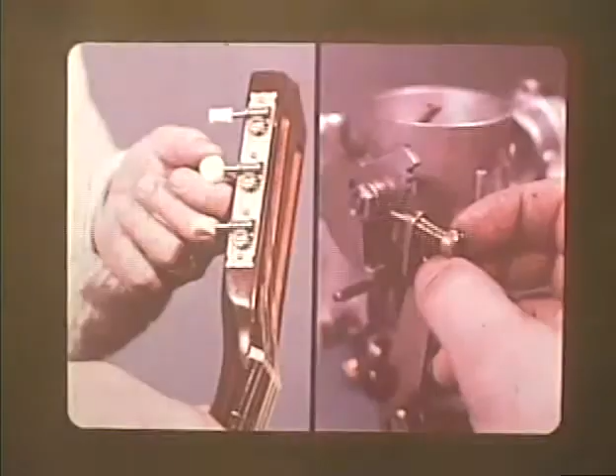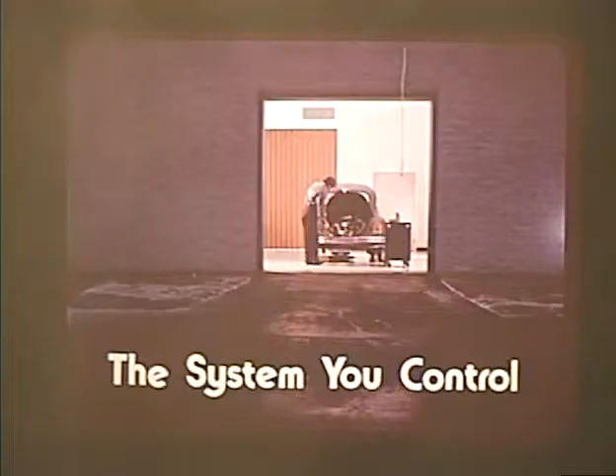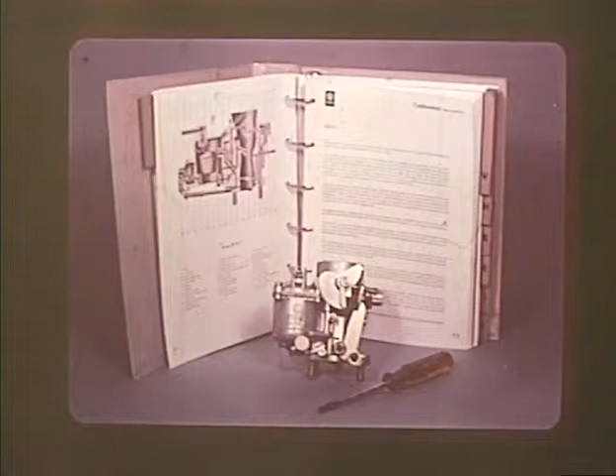Whenever you work on the repair or adjustment of a Volkswagen carburetor, you're really involved in a system that has to be kept in tune. Once it's in your hands, it is a system you control. Its many parts and circuits are all designed to operate at maximum efficiency, all engineered to the highest standards in the automotive business. And even though the Volkswagen carburetor is designed to virtually regulate itself, there's a critical adjustment that depends on your skill to make that system perform the way it was intended.

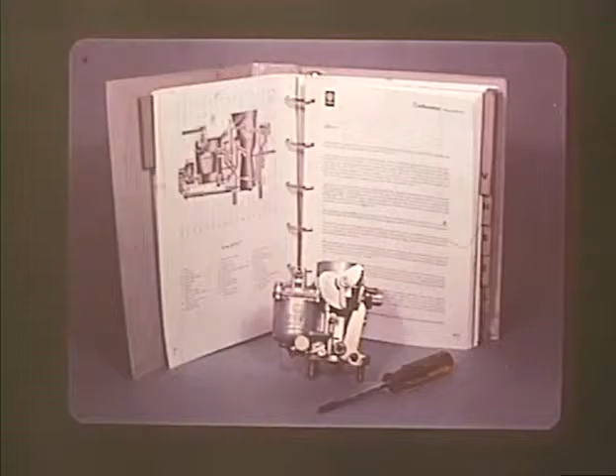We're talking about the idle speed adjustment. So whether you're working with the 28 PICT, the 30 PICT-1 or -2, the 30 PICT-3, or even the 34 PICT-3, it's the idle speed adjustment that brings the Volkswagen engine up to full, smooth efficiency.

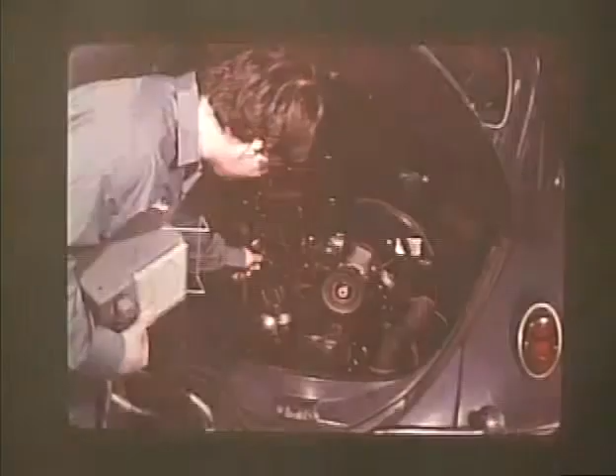And that efficiency is based on two factors: the idle RPM and the air-fuel mixture. It's this combination, correct idle RPM and correct mixture, that keeps the engine running efficiently, not too fast or slow, or too rich or lean.

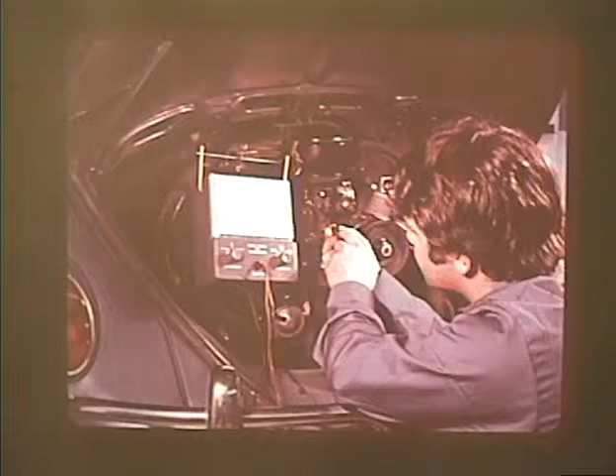And here's where you come in. Let's talk first about idle speed. Turning the idle speed adjusting screw to the right opens the throttle valve and increases the engine speed. Turning it to the left closes the throttle valve, reducing the speed.

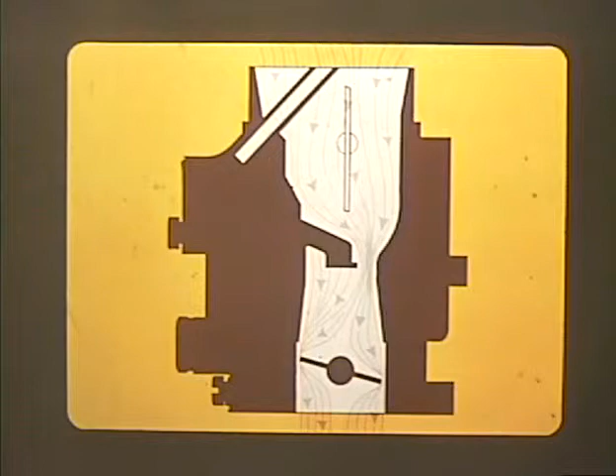But what's actually happening to the system as you adjust the idle speed? Let's take a look inside. As the engine runs, the intake strokes of the pistons draw air through the carburetor. The carburetor, which is like a tube, has a throttle valve towards the bottom, which controls the amount of air to the engine. Air rushing through the narrow opening between the slightly opened throttle valve and the carburetor causes a vacuum under the throttle valve.

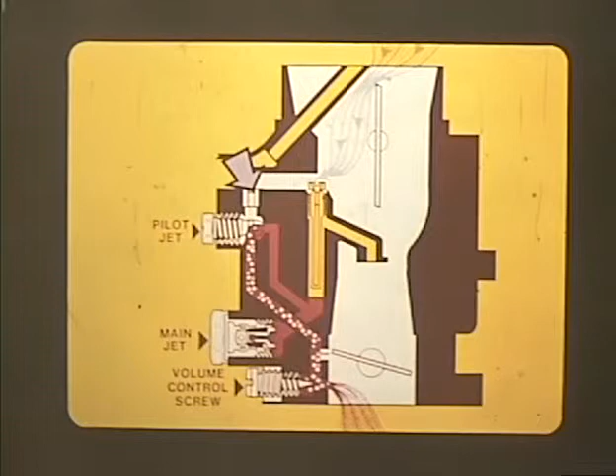This section of the idle circuit diagram shows the fuel about to be mixed with incoming air. The vacuum, which is below the throttle plate at idle, draws fuel from the float bowl through the main jet to the pilot jet. Air for the pilot jet is drawn into the circuit through a calibrated hole at the top of the carburetor. The fuel and air meet and mix at the pilot jet, and this mixture travels to the volume control screw, where the amount or volume of this mixture is controlled before being allowed to be drawn into the engine.

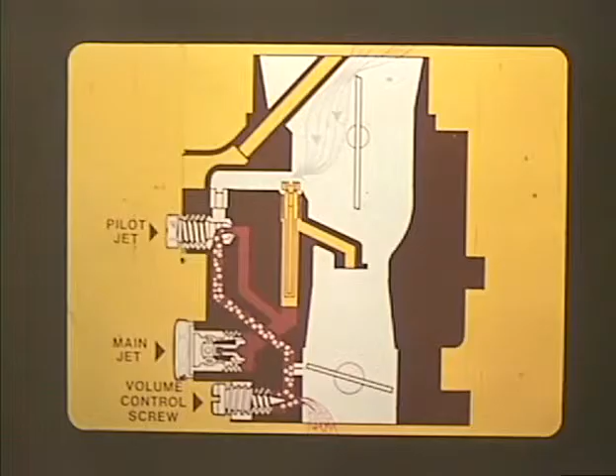Turning the volume control screw inward closes the passage and reduces the amount of idle fuel-air mixture. Turning the volume control screw out opens the passage and allows a greater volume of idle fuel-air mixture to travel to the engine. So we are concerned with only two carburetor adjustments for correct engine idle: engine RPM and idle fuel-air mixture. Of course, there are many other factors which influence engine operation: condition of the ignition system, ignition timing, compression, and engine temperature.

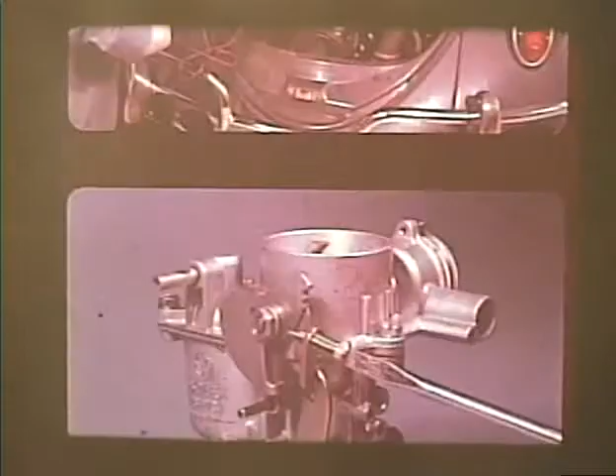A tachometer must first be attached to the engine before correct adjustment can be made. Turn the idle adjusting screw in or out until the idle RPM is correct according to the tachometer. Then adjust the volume control screw, turning it in slowly until the engine speed starts to drop. Then turn it out between 1/4 and 1/2 turn until the engine runs smoothly. Now repeat the idle speed adjustment, watching the tachometer, and if necessary, readjust the volume control screw.

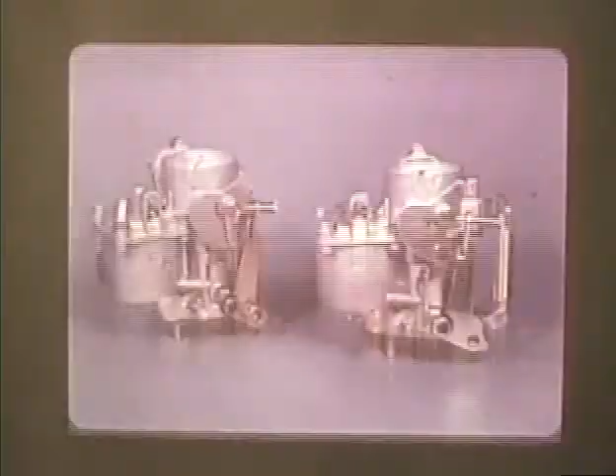We've been talking generally about the 28 PICT and the 30 PICT carburetors. Although they are different models, they do have the same adjusting sequence: first the idle RPM, then the volume control screw, and finally check the idle RPM again.

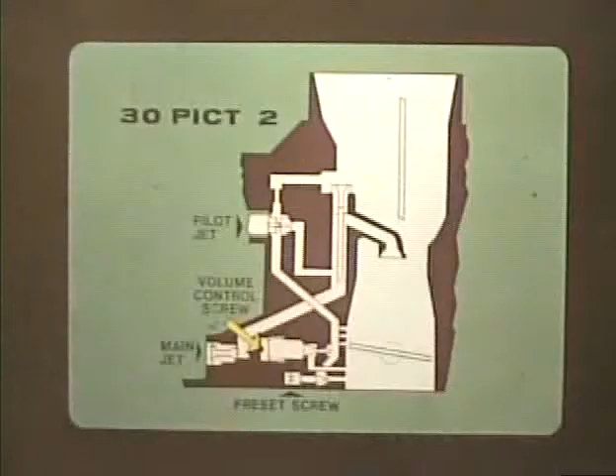But on cars equipped with emission control devices, some changes were made that require different adjustment techniques. The 30 PICT-2 carburetor, which was installed on 1968 Types 1 and 2 vehicles, is the first of the emission control carburetors. The idle speed is controlled by an adjusting screw which opens or closes the throttle as before, but notice the changes in the idle circuit. Air entering the idle circuit passes through a calibrated hole to the pilot jet where it mixes with fuel.

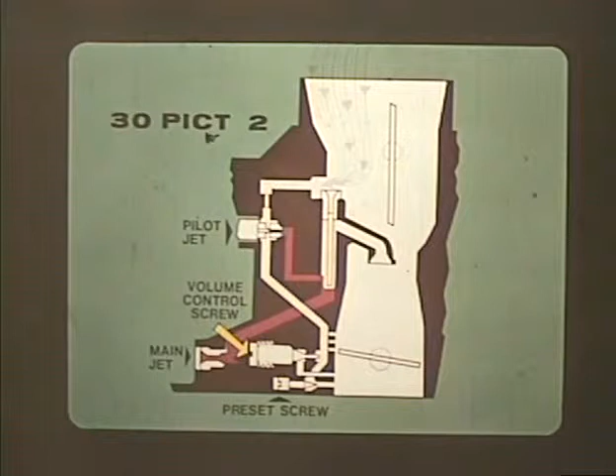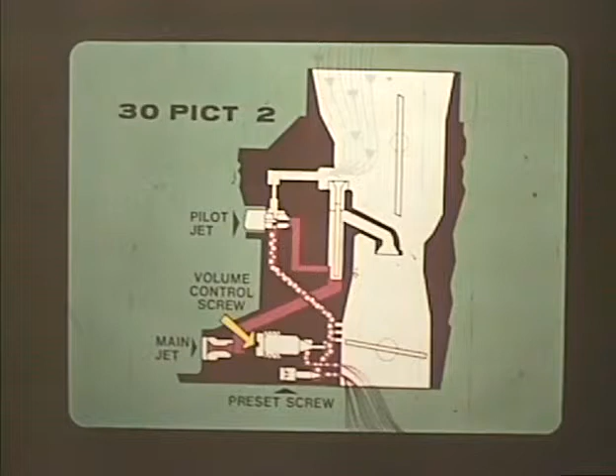The fuel-air mixture reaches the volume control screw as before, but a portion of the mixture is controlled by a factory preset screw, so adjusting the volume control screw makes only a small difference in engine RPM.

To adjust a 30 PICT-2 carburetor correctly, be sure that all other engine adjustments are correct and that the engine is warm. With the tachometer attached, adjust the idle to the correct RPM with the idle adjusting screw.

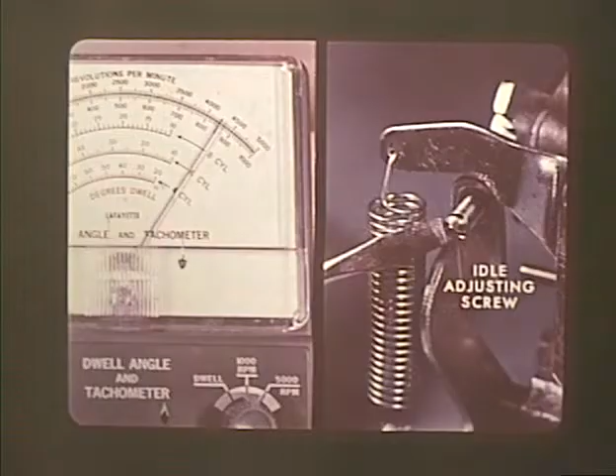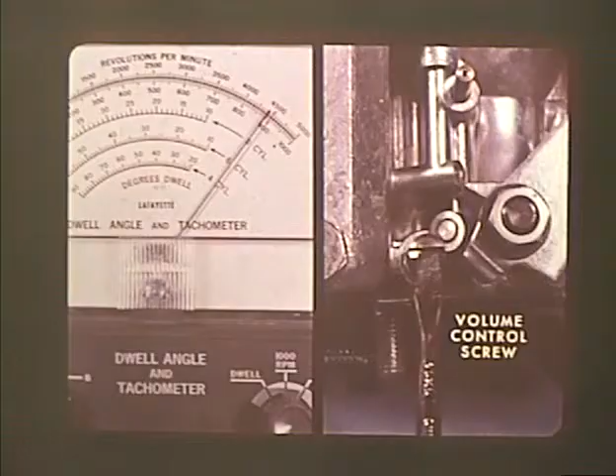The volume control screw is slightly different, and because of the refined system, it makes only slight changes in engine speed. Watch the tachometer and turn the volume control screw in carefully until the speed drops slightly, then unscrew it until the fastest RPM is reached. The idle speed may have to be readjusted.

With the 30 PICT-2, as with other carburetors, be careful of the volume control screw. It is delicate and easily damaged if forced against its seat.

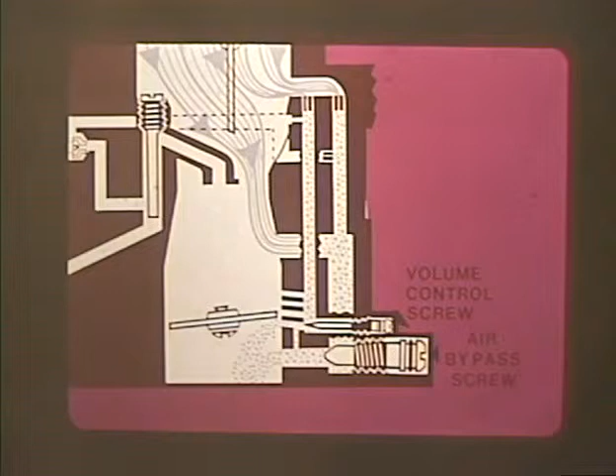The 30 PICT-3 carburetor, introduced on the 1970 models, has some significant changes. Remember how we controlled idle speed by opening the throttle valve in the other carburetors? Well, in the 30 PICT-3, the throttle is always closed during idle. Idle air now bypasses the throttle valve and is controlled by the air bypass screw. Unscrewing it opens this passage, allowing more air to the engine.

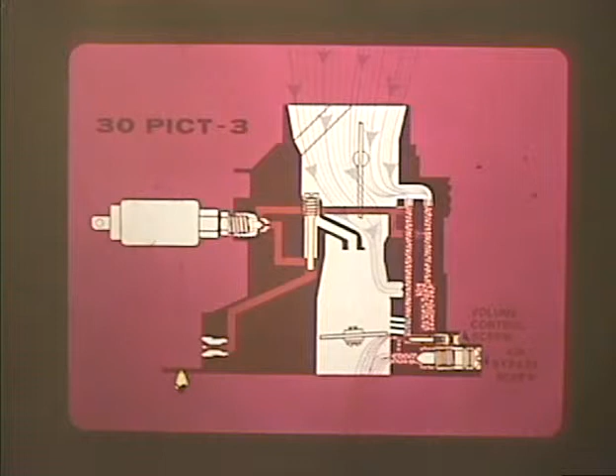The fuel circuit has also been modified and is now connected to a volume-controlled drilling and an air bypass where it mixes with the incoming air. Since the volume control screw is preset at the factory, the air bypass screw controls idle speed, and the air-fuel mixture is monitored automatically. Idle speed adjustment on the 30 PICT-3 is very simple.

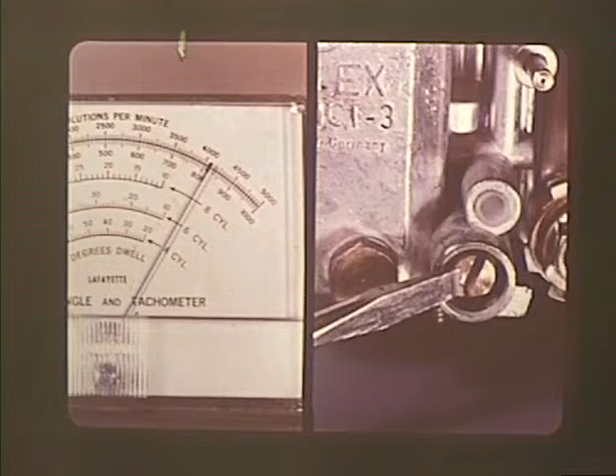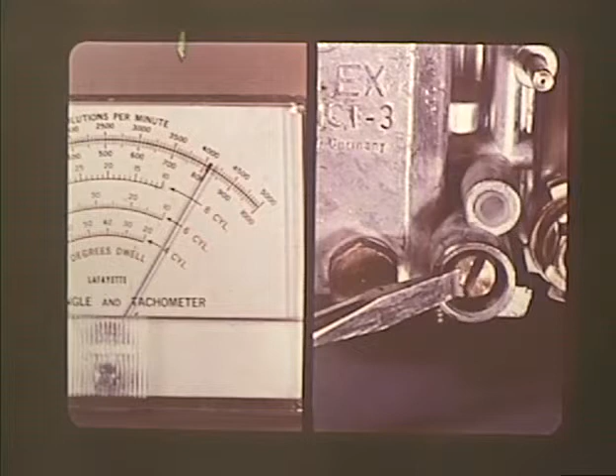With the engine at normal operating temperature and a tachometer attached, adjust the idle speed by turning the air bypass screw. Turning it in reduces the speed, turning it out increases the idle speed, and the fuel mixture is automatically regulated. This is the only adjustment you make on the 30 PICT-3.

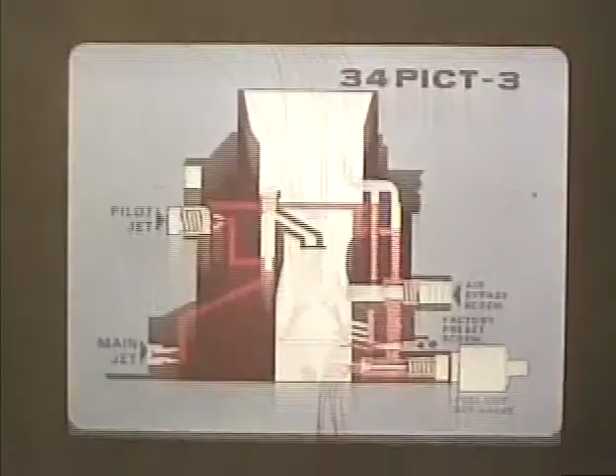That brings us to the 34 PICT-3, the carburetor found on 1971 models. Its functions are the same as those of the 1970 carburetor. The important difference, aside from its larger size, is the relocated air bypass screw and the fuel cutoff valve.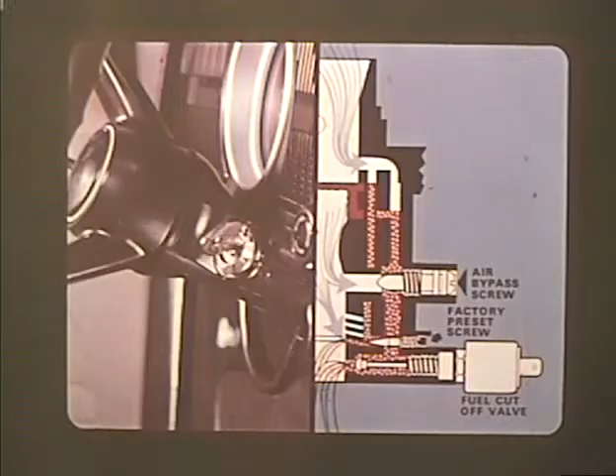When the ignition is switched on, the fuel cutoff valve is held open and the idle fuel-air mixture can reach the engine. When the ignition is switched off, the valve closes and no fuel can reach the engine.

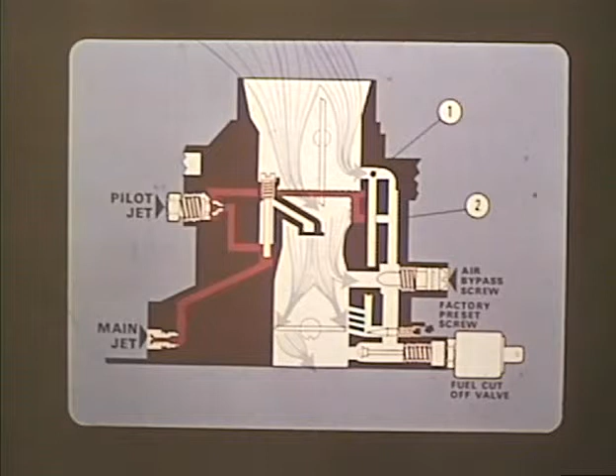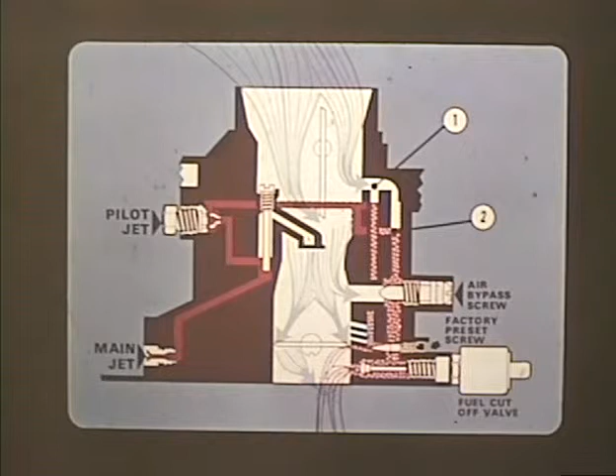During idle, fuel from the main jet is drawn through the pilot jet to numbers 1 and 2, where it mixes with air from calibrated drillings. In drilling number 1, the fuel-air mixture flows past the factory preset volume control screw and onto the engine. In drilling number 2, the rest of the fuel-air mixture, controlled by the air bypass screw, passes through the open fuel cutoff valve and onto the engine.

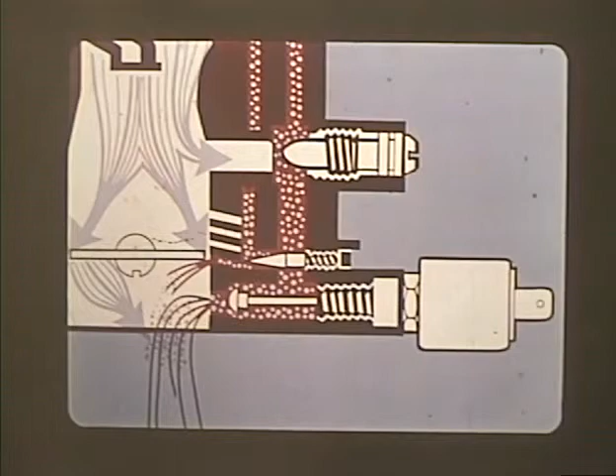Unscrewing the air bypass screw opens the passage and allows more air and also more fuel to reach the engine, which of course raises the RPM.

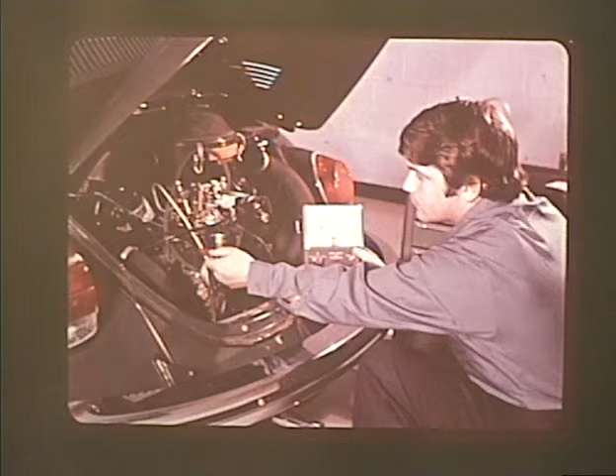The preset volume control screw on the 34 PICT-3, covered with a plastic plug, should not be touched during a normal idle adjustment. To adjust the idle speed, simply connect a tachometer to the engine, first making sure the ignition timing is right and that the engine is at operating temperature.

Then turn the large air bypass screw until the engine is at the correct RPM. This automatically changes the fuel-air mixture to compensate for the changed RPM.

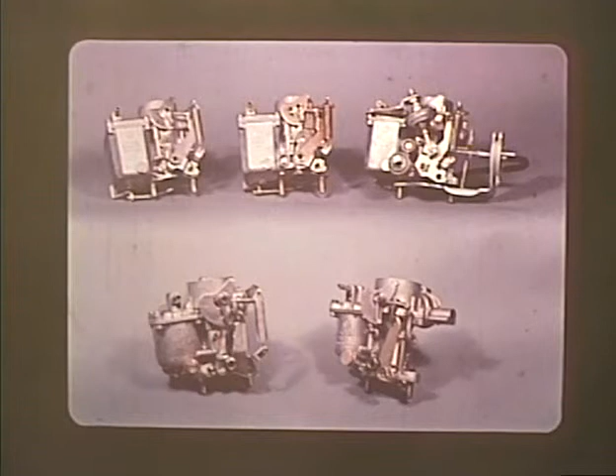All Volkswagen carburetors, from the 28 PICTs to the latest 34 PICT-3, work on the same principles. Correct idle adjustment on all of them depends on a precise balance of fuel and air at the proper RPM.

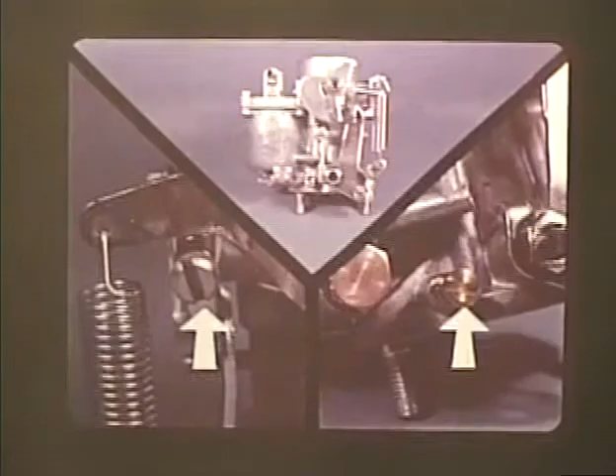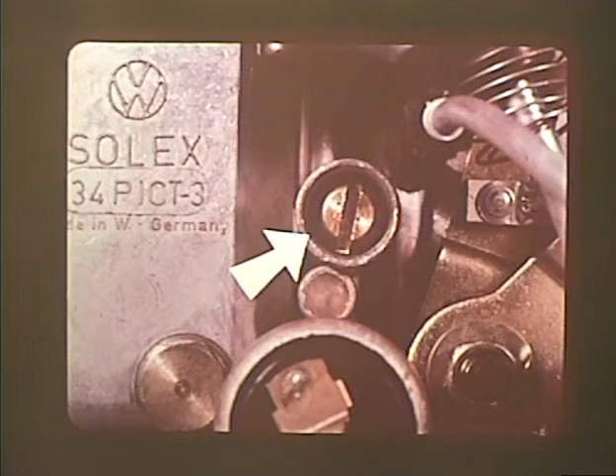Careful adjustment of the volume control screw and idle speed screw are essential on the older carburetors. And on the newer 30 and 34 PICT-3, the air bypass screw adjustment is vital to controlling the amount of unburned fuel that goes into the exhaust at idle speeds.

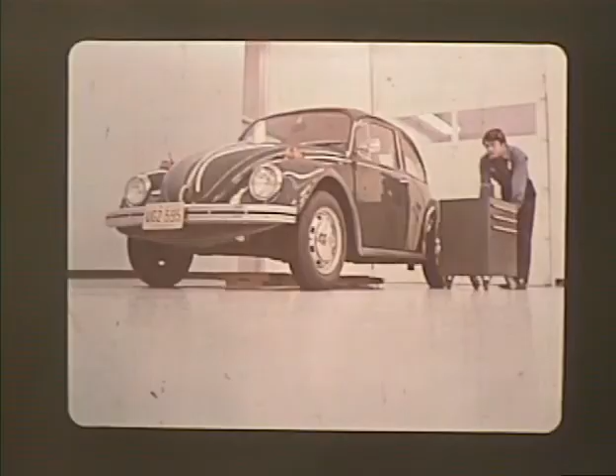The important thing is what you know about every Volkswagen that rolls in for checkup or repair. And you have to know the system, the Volkswagen carburetor system, because the idle speed adjustment you make is the key to the efficiency of the system you control.